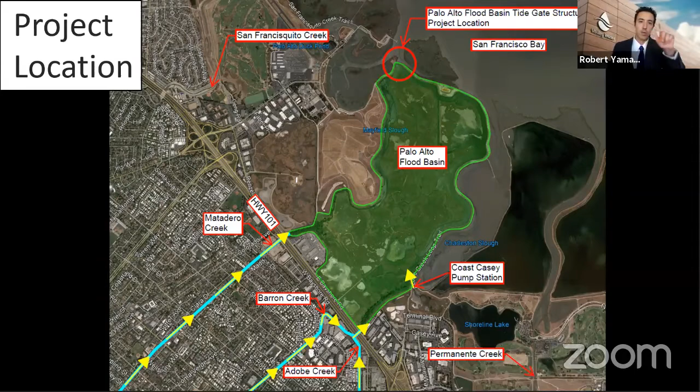And the project objectives for this is it's a structure replacement project. So we want to maintain and replace the existing tide gate structure, which is over 60 years old and has just aged beyond its service life.

And we want to maintain or provide a better level of service for the flood protection for Matadero, Barron, and Adobe Creeks, as well as to protect parcels and Highway 101 that could have coastal flooding if the existing structure were to completely fail. And also in doing the new structure, to practically address impacts to flood protection due to future sea level rise, and also limit impacts to existing habitat within the Palo Alto flood basin.

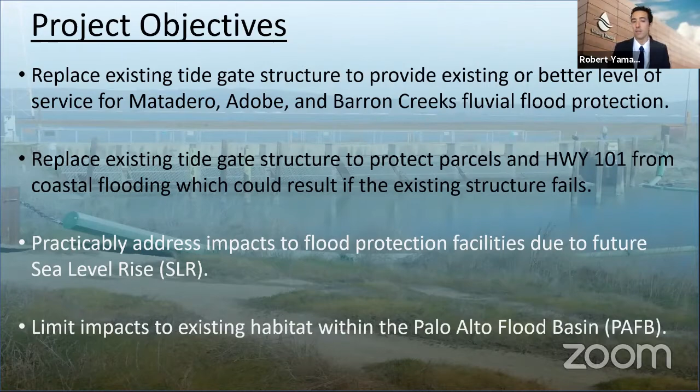And this is just a picture of some of the condition of the existing structure, some spalled concrete and exposed rebar and just weathering. Just imagine this over a 60-year concrete structure in a marine environment. It doesn't have epoxy coated rebar and that type of stuff. So it's reached the end of its service life.

And we've had structural evaluation of this and it's recommended that it be replaced. And that's why we're proceeding forward on this.

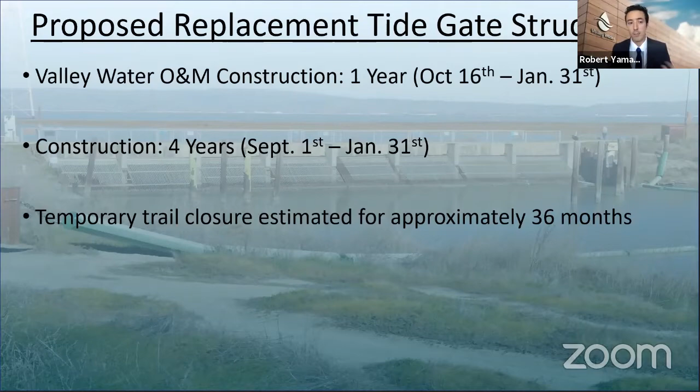From a high level perspective, the schedule, we're looking at a 1-year proposed this year to do a surface improvement to the levee surface, which I have a slide on. And then following that would be 4 years of 5-month construction windows with an external contractor to do the actual tide gate structure replacement work and the dewatering and all this stuff. Temporary trail closures are estimated to be a total of 36 months.

Only thing to add here on this tentative project schedule is that we are currently going through the process of obtaining environmental permits to do all the work. We're hoping to get those this summer or fall, as well as complete our 100% design by the end of the year. So all these dates are tentative and pending project development and acquisition of these environmental permits.

So the trail work I just spoke on is shown in pink on the screen. It goes from the tide gate structure down to the San Antonio roadside. We're proposing to do this work this year using Valley Water O&M staff. The current levee trail is a soil earth levee material, so it's more of a summer, dry weather type of access.

And what we're proposing to do is to put down a geotextile fabric with class 2 aggregate base, 3/4 inch maximum, so it's not really big aggregate, compacted really well. That's to make it an all season, pervious surface that can function as a trail and also provide protection against the construction traffic.

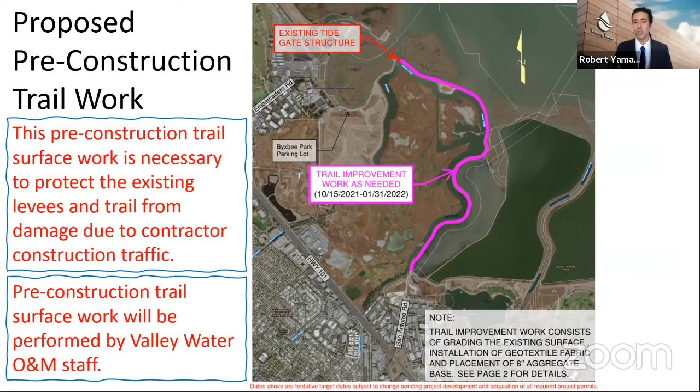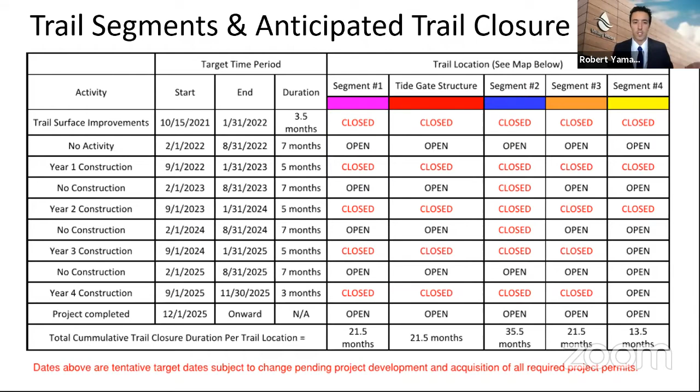And the following 2 slides kind of go together. This is a table showing our anticipated timing of the different trail segments that would be open and closed depending on the time of the construction. This is one of the attachments in the agenda, and it ties in with these color coordinated trail segments on this map, which is also one of the attachments.

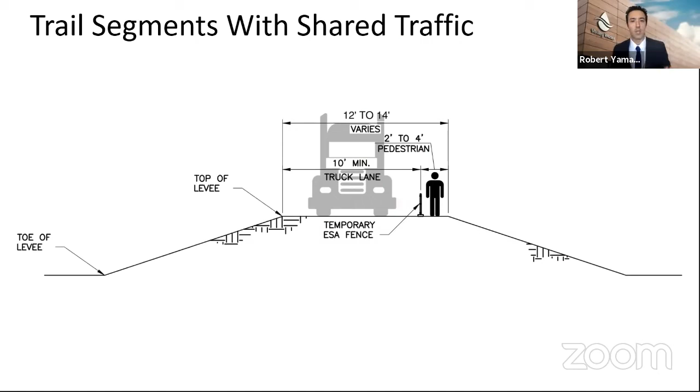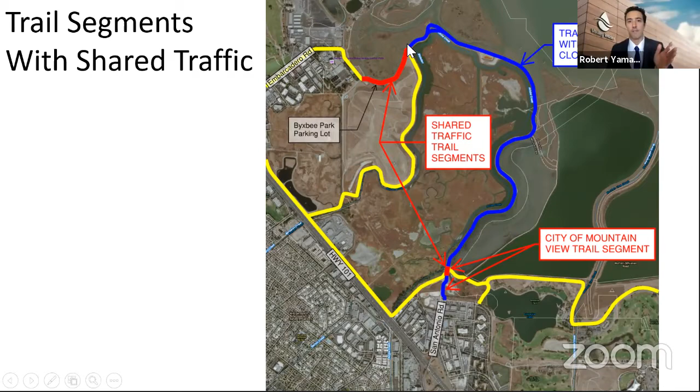There are also 2 locations where we need to keep the trail open for part of the detour route. I'll show you on the following page, which would have shared traffic with the construction traffic. These are the 2 locations in red, a little tiny spot at the intersection here, and then from the Byxbee parking lot area to that first intersection.

We're planning to install these construction project signs, 4-foot by 4-foot, as soon as we get approval. It's been going on for a while and I'm trying to get that finalized. These would be one on each side of the tide gate structure, installed as soon as we can get them finalized to show the public.

Also, we want to install 11 by 17 laminated signs both here and in additional places. These would be able to be replaced more frequently, annually or however often we need, to show the trail closure dates more accurately. We can talk about this later, but we were hoping to get some feedback from the commission.

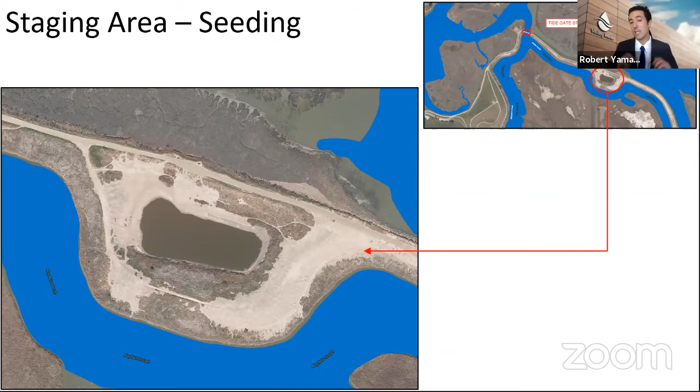Or the city about the temporary staging area right here, which is this donut area to the east of the existing tide gate structure. Currently it's mostly barren, but there are some patches of vegetation, and we weren't sure if it's going to be used as a staging area, if the city would like to see this more as a trail use, or would like it attempted to be seeded or whatnot. It's an area we can talk about.

Post-construction benefits, again: continued flood protection and continued use of the Adobe Creek Loop Trail. The trail with the new tide gate structure will be a little wider and have a more aesthetically pleasing railing instead of the chain link fence. Educational signage near the new structure will talk about the history, and we can coordinate that with the city, as well as the new motor-driven sluice gate that will be on the new structure.

It will have advanced technology that can be operated remotely and set up on a schedule, providing better control over the water elevation within the basin, which would help with mosquito breeding, as well as maintaining consistent water quality in the basin. And then lastly here, the anticipated construction traffic route.

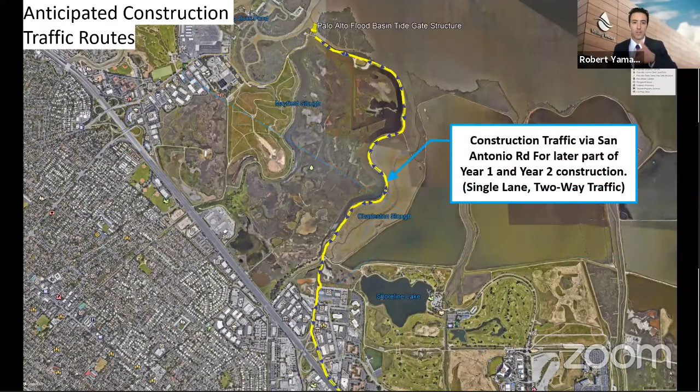Regarding public outreach, we would like to have a pre-construction public meeting prior to actual work commencing, as well as the project signage we talked about, and our project website, which we'll keep updated at all times regarding trail closures, maps, and all that. We'll also do a Nextdoor outreach, as well as physical postcard mailers.

And now Alex Hunt, I'd like to ask if you could talk about the environmental resources and impact.

Sure, thanks Robert, and hello commissioners. As Robert mentioned, my name is Alex Hunt. I'm the environmental planner supporting this project. First I want to acknowledge that we at Valley Water certainly appreciate the very special setting that this project occurs in. We've got many sensitive and protected fish and wildlife species in the area.

Shown are just a few of them here, but there are certainly many others. In addition to the biological value of the area, the project area also supports the Adobe Creek Loop Trail, which is part of the Greater San Francisco Bay Trail. During our site visits, we saw how heavily utilized this trail system is, and frankly, staff at Valley Water who live in the area have really emphasized its importance to the project team.

Next slide, Roger, or Robert.

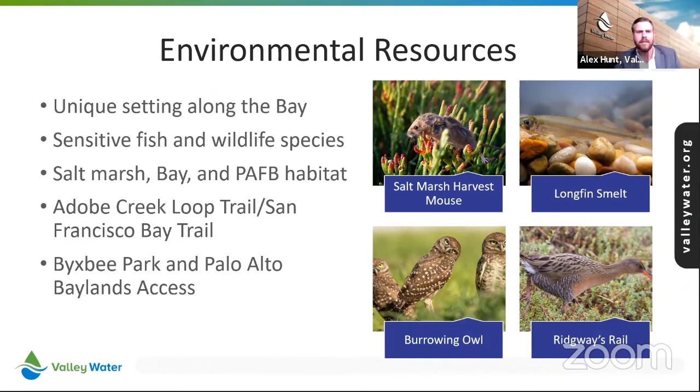With those impacts in mind, we really thought long and hard about ways to avoid and minimize our impacts on the environment. First and foremost, we knew that any way we constructed this project, we were going to be limited to a work period between September 1st and January 31st, to prevent any impacts to nesting California Ridgway's rail, which is an endangered species out in the area. But with that limited work window in mind, we evaluated various options. Really, all the options that occur right near the tide gate had pretty small and comparable wetland impacts.

So that wasn't a big way that we could differentiate between alternatives. However, we did do some hydraulic modeling, and we found that some options had the potential to cause some erosion along the edge of Hook's Island, which supports a large, very nice patch of salt marsh habitat.

And so we rejected any of the options that could result in this erosion. We aligned the proposed tide gate in a manner that ensured the island was protected. We also sought options and configured our approach in a way that minimized the total length and duration of the trail closure.

But given we know there will be some temporary impact to trail users, we found it important to incorporate new educational signage on or near the tide gate to highlight environmental or historic resources to the public. We look forward to working with city staff on the details of what's most suitable at the site.

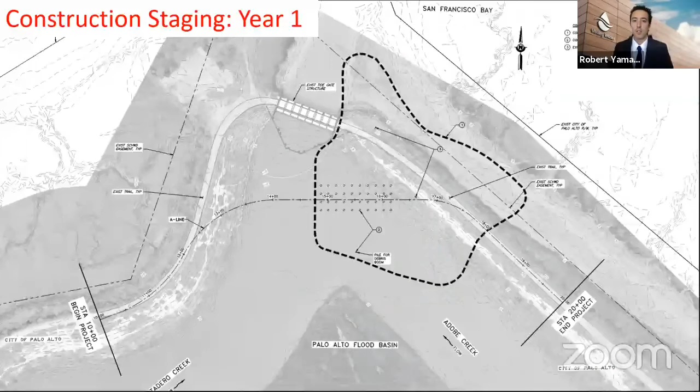It's because of the multi-year construction: mobilize, demobilize, and also before we can do any of the work. I didn't want to get into some of the technical details, but basically the dewatering system is a huge cost, because in order to do any of the work, a sheet pile needs to be installed into a large perimeter around this thing, or a cofferdam sheet pile needs to be installed in order to keep the water out of the work area. So there's a lot of preparatory work that needs to be done just to get in there and work.

And then we can only work for 5 months, outside of the California Ridgway's Rail breeding season, and then the contractors get out and come back again the next year. So that's this multi-year construction that really drives up the cost. Also, the reason for doing this is because it serves a very critical function: a large amount of water can come in if we have a 100-year storm, and so we can't cut off the existing structure until the new structure is built and put into service. So, anyways, that's just a justification for the high cost.

Thank you, Jeff, anything else? Good, nothing. Good, okay, thank you. And Commissioner Olson, anything?

Yeah, one quick question: do we think the new tide gate will last as long as the old one? Well, we think they'll last a lot longer because we have better concrete now. And one of the main things is that we're going to use -- it's a marine environment.

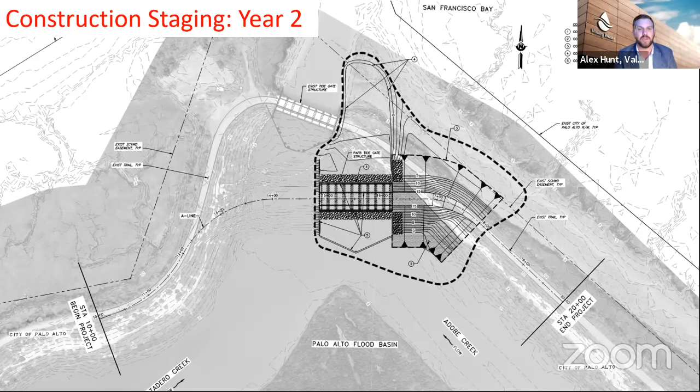In coordination with the regulatory agencies, who we've been discussing this with over the past couple months, it looks like we'll be purchasing mitigation credits from the San Francisco Bay Wetland Mitigation Bank, up in Foster City. Essentially you just give them money and they've already mitigated in advance for you. So what does one-tenth of an acre of wetland cost? Well, we have to mitigate at greater than a 1-to-1 ratio, and we also have to mitigate for what's called temporal loss of the dewatering area. Anytime you have an impact that extends greater than 2 years, in this case we're kind of right there, you have to mitigate for that. So all told, we're buying four-tenths of an acre, which is going to cost about $800,000.

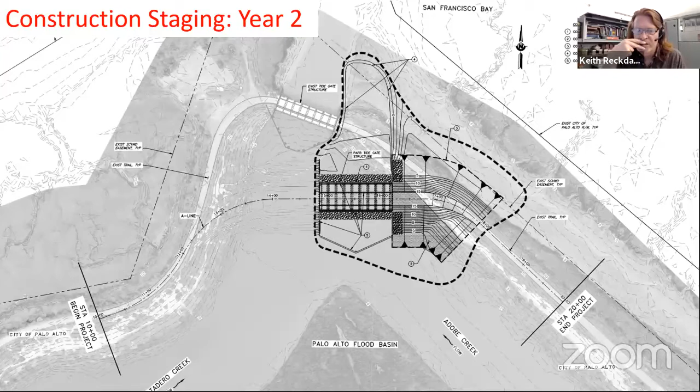Thank you. You also were talking about Hook's Island, so you look at the flow going through this and you're worried about whether it's going to cause erosion. Will this change the sediment, how sediment is delivered? Because we have that sailing area right over there, will we have any issues with sediment filling up our sailing area?

Sorry, where exactly are you? Okay, talking right there, just to the left. Oh, I'm sorry, the sailing area. Sailing, yeah, I'm sorry, I was hearing saline. I dropped my G's, sorry, it's confusing in this environment.

Yeah, no, that's something we specifically looked at. That's part of the reason we did this modeling, is there's a tidal channel that, as you know, runs from the tide gate pretty much straight to that sailing dock.

We were concerned that by adjusting the tide gate itself, the channel might migrate away from the sailing dock. But given the distance and the way we're creating this pilot channel, modeling suggests that's not going to be a problem for us.

That's why we wanted the new tide gate structure to have its outlet in the same slough as the existing one. There's this throat right here, where the existing tide gate structure is, and we're aligning with that. This is over 1,000 feet out to the sailing structure, the sailing ramp.

We also looked at the velocity differences, and that's why this is a good option, because it maintains the same characteristics. So I do think that shouldn't be an issue. The angle of this tide gate is different than the previous one, but that won't change the flow, which is basically still unchanged.

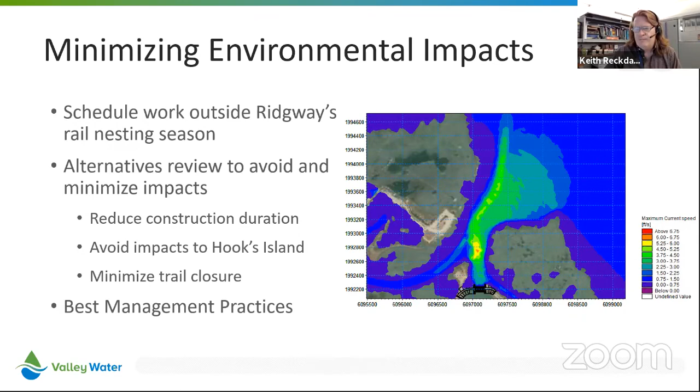We'll definitely do our outreach. Like I went over, we have the different methods — signage, our Nextdoor posts and postcard mailers, and a pre-construction meeting.

The city, Daren, do you have anything to add? We'd like to work closely with Valley Water, like we have this whole way forward — we've been working on this for quite some time. I think the way forward would be enhancing the outreach they're doing through good communication with Megan Taylor, our Chief Communications Officer. So as we get materials, whether flyers or public meetings, we'd help disseminate that word even better. But I don't think the city would be hosting extra outreach meetings.

I think that's a good way to have one person run it and we can push people towards that. Isn't there an outreach meeting tomorrow? I thought Valley Water was having one. No, not that I'm aware of. Am I imagining it? Okay, I'll dig that up.

So Daren, what's the timing? If we pass this tonight, it goes to council — when does the PIO get approved? It would go to council after their break; we're trying to shoot for the very earliest, very early August, to get on the consent calendar. Two weeks afterward they'd have the second reading of the ordinance, and then construction can begin 31 days after that. So you really have a tight schedule to get it done so you can start in September and be done by January.

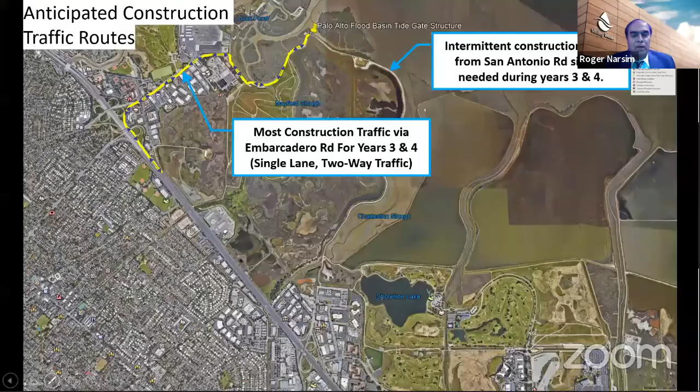Yeah, I agree. So we need to work, Robert. I think we had to mount a pole and a post with a pocket to have these flyers in there. That way it will have the detours, it will have more information, and we can mount this post - not this kind, not this big, because we're not ready for that one still. But I'm talking about a simple pole with a post with the pockets, and we can install that in a few places. We can tie it on.

There's a bulletin at the bathrooms on the Bixby side. Going back to Alex's comment, we should go back and look at all the places where we posted up for the MND. I think we had good multiple locations. Alex, with the posting on an A-frame, that's temporary - we can do that too. But we don't want to do that on the A-frame because we want to keep it on the side. Let's talk about it, okay.

And I need to get this rolling. I don't want to give the false impression that it takes a while. So I don't have this sign, which I thought would have been done months ago. We've coordinated it with Daren and the ad hoc committee for the Tidegate structure, the 3 commissioners. And it somehow got into the hands of one of our directors, and they want to look at it. So I need to track it down and really get that through.

Regarding the 11 by 17s, I'll get that going right away too, because those are the ones we can post up. We have been preparing the signs for the last 6 months, let me say that. We don't need to solve all these problems right here in this meeting, but just want to make sure it happens.

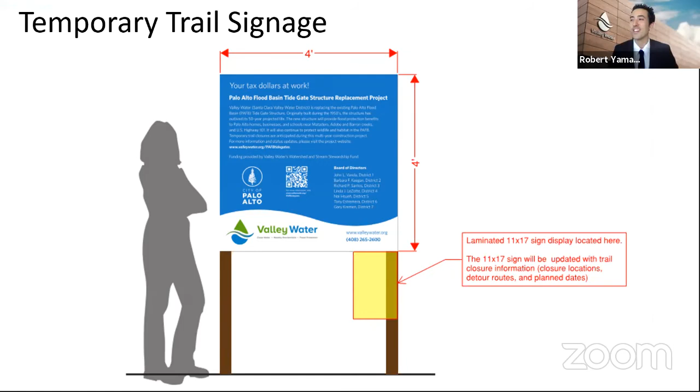I dug up the Valley Water, and it's June 24th, but that was last year. A year ago, you must have had - that's true, a Zoom meeting. Yeah, that's right, you're correct, okay, 1 year ago.

Okay, so I'm sorry. I have one last question for Daren.

Big picture, I was looking at the proposed PIO, and it's talking about mosquitoes and maintaining water quality. Daren, can you give us an overview of how we plan on using this? Are we actively raising and lowering this sluice, or are we just letting the water come down and letting the passive gates do their work most of the time?

Great question, and it's different right now than it used to be because of the condition of the existing structure. Prior to its most recent problems, going back 5 or 6 years, rangers would come out and adjust the gate as necessary. It varies during the time of year how frequently they make adjustments. There are times you can leave it static. Approximately 6 inches open got us about a foot of tidal exchange, which would bring in water and flush it out for a good exchange.

So you've got the gravity fed exit, and this one tidal gate where we can allow water in. During the rainy season, there are times we just leave it closed and you don't have any tidal water coming in—it's just passively exiting the water from the basin to the bay. The mosquitoes factor in because we've got a particular height, negative 2.2 feet in the winter. If we rise above that, we start to get ponding, and water will accumulate in low areas of the marsh in that 600-acre flood basin area, and mosquitoes will breed. So it's very important that we monitor that water.

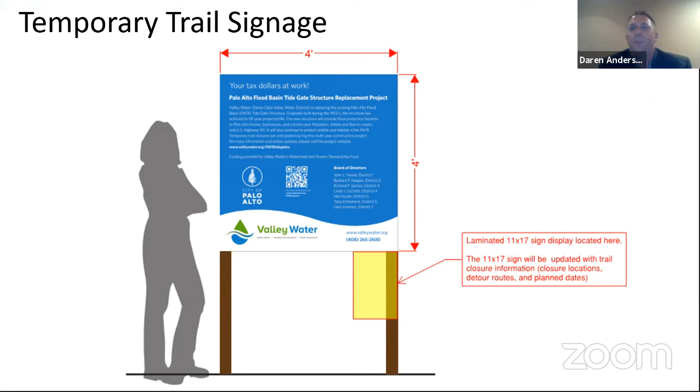Okay, very good, thank you. That's all, Ann, I'm done with my questions. Thank you so much, Keith. They were great questions, I appreciate that.

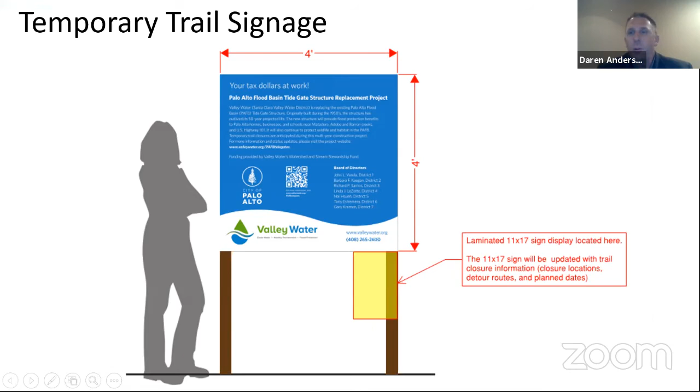Daren, we need to have a motion now. Yes, you can basically use the one in the staff report—the recommendation that City Parks and Rec Commission recommends that council adopt and approve the park improvement ordinance for the Tide Gate project. Okay, would somebody like to make that motion, please?